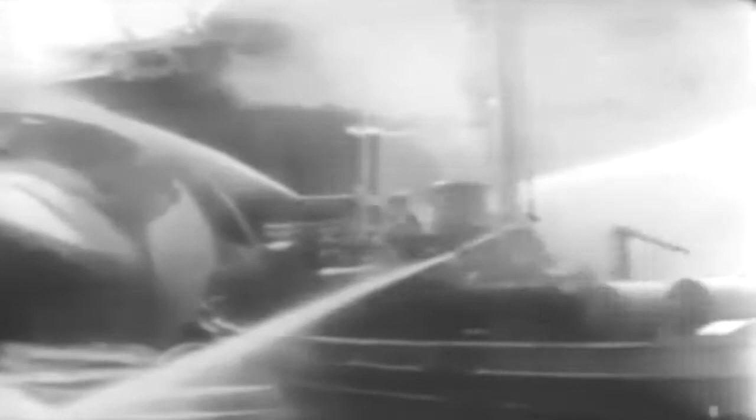The capsizing was the result of a combination of circumstances. First, the reduction of the ship's metacentric height, or stability, to a negative value, causing the ship to heel over. This took place soon after the streams of water had collected on the upper decks. Secondly, the ship's effective freeboard was reduced because of open air and cargo ports on E deck. As the vessel listed past 13 degrees, these ports were submerged.

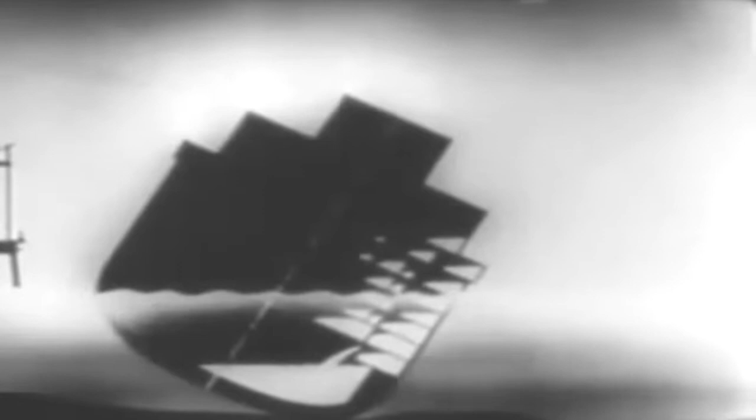Thirdly, a further loss of stability and consequent increase in heel due to the port bilge forward grounding on the rock ledge on the falling tide. The ship was completely flooded fore and aft up to the outside waterline.

The Secretary of the Navy appointed a special committee to make recommendations with respect to salvage or other disposition of the USS Lafayette. The recommendation of the committee was that the vessel should be raised.

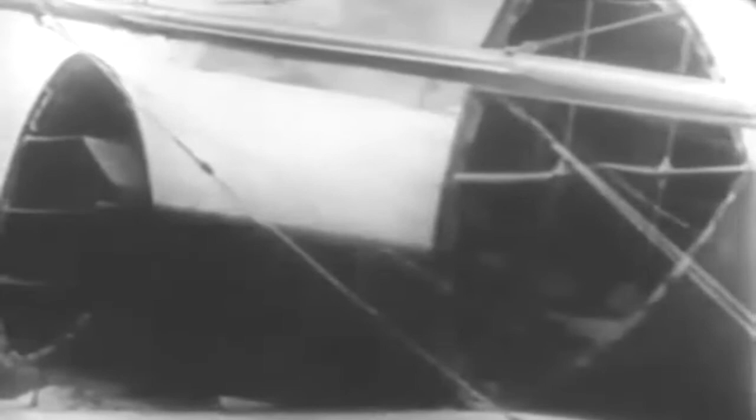The Bureau of Ships placed the vessel under the cognizance of the Supervisor of Salvage, Commodore W.A. Sullivan, who in turn was succeeded by Captain B.E. Manseau. They had at their command the facilities of the Navy Salvage Service, which consists of the salvage section of the Merritt, Chapman, and Scott Corporation, operating under the General Ship Salvage Contract, NOBS 36.

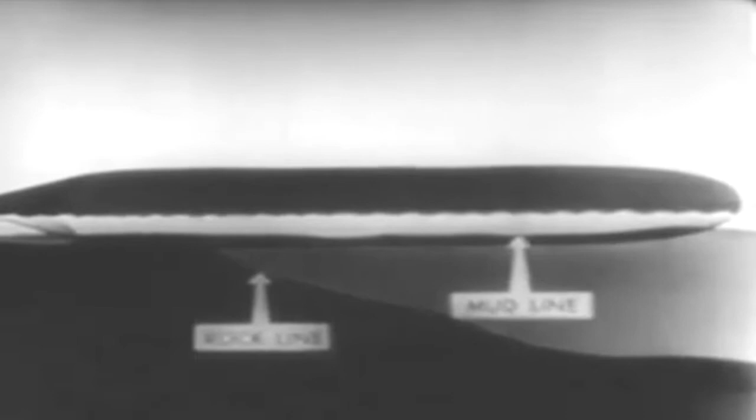At a point about 1/3 the length of the vessel from the bow, the rock profile of Manhattan sloped steeply off into the riverbed. A considerable portion of the vessel's weight rested on this rock shelf. The after 2/3 of the length of the ship was supported and surrounded by mud and soil of various densities. Actually, the possibility of salvage by pumping depended upon the soil in which the after portion of the ship rested ultimately developing enough bearing to resist the initial tendency to settle by the stern.

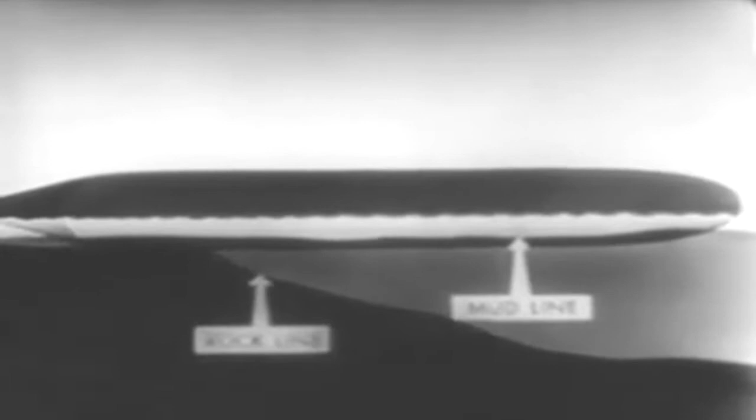It was the decision of the engineers that the ship should be raised by controlled pumping. To supervise the work, engineering offices were erected on a barge alongside the Lafayette, and details were worked out in the main offices of the Merritt, Chapman, and Scott Corporation. Upon Mr. A.C.W. Seekey, naval architect and consultant engineer, Merritt, Chapman and Scott Corporation, rested the entire program of stability and strength calculations.

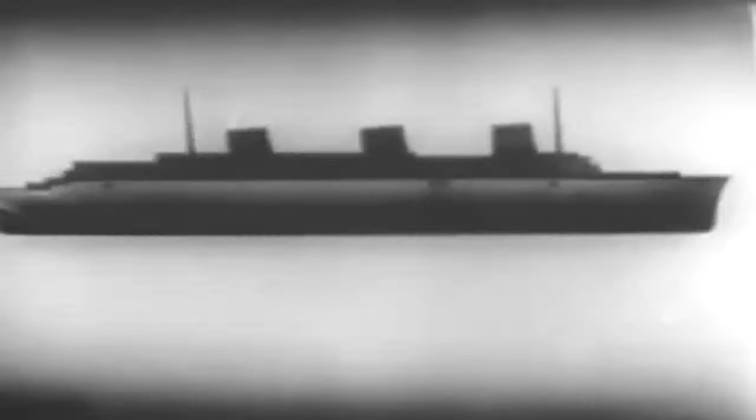The preliminary step in the salvage operation was the removal of the superstructure above the promenade deck. Controlled pumping involved the division of the ship into numerous watertight compartments. The compartmentation of the ship was based upon the original watertight bulkheads. Wooden watertight bulkheads were constructed between decks where no original watertight bulkheads existed.

To complete the compartmentation, the promenade deck and certain decks below were made watertight. This compartmentation was necessary to control the relationship between the center of gravity and the center of buoyancy during righting operations, and also to control any unforeseen leaks or failures.

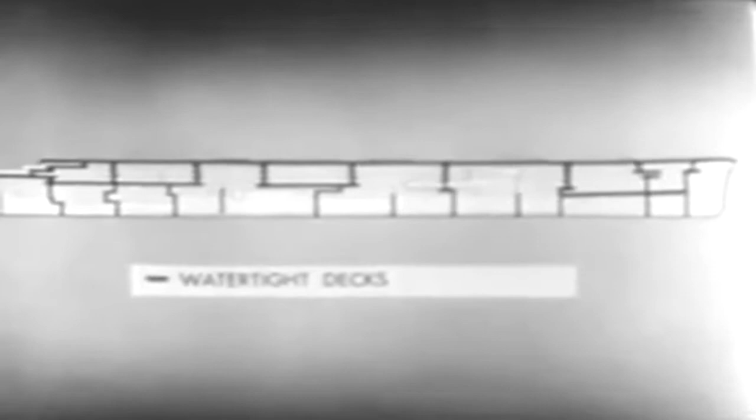At the beginning, there was only a limited number of experienced divers available. Consequently, 2 diving schools were organized at Pier 88, 1 civilian and 1 for Navy divers. As the student divers gained proficiency in handling underwater tools and the diving dress, they were sent out to do underwater work on the Lafayette. Eventually, as many as 73 civilian divers were employed at one time, besides a considerable number of Navy divers.

Diving conditions were extremely hazardous. Jagged steel edges and broken glass were an ever-present threat. The maze of debris-packed passageways presented a terrific problem. The men worked in complete darkness, the water in the slip containing such an amount of mud and sewage that underwater lights were useless. Work was accomplished by sense of touch alone.

Approximately 5,000 tons of superstructure was removed, slightly less than half of which was submerged and was cut away by divers using the underwater gas torch. These decks were removed to lower the center of gravity and to make accessible the various uptake openings for patching.

When the Lafayette capsized, furniture, stores, and other loose objects accumulated on the port side, blocking passageways, making it necessary for divers to clear away this debris before commencing the actual salvage construction. All minor cabin bulkheading and ship's piping was removed to lighten the ship as much as possible and to make room for the watertight bulkheads. These operations often were carried on in 50 feet of water and 10 feet of mud, since much of this debris had settled to the lowest possible point, the submerged port side of the ship.

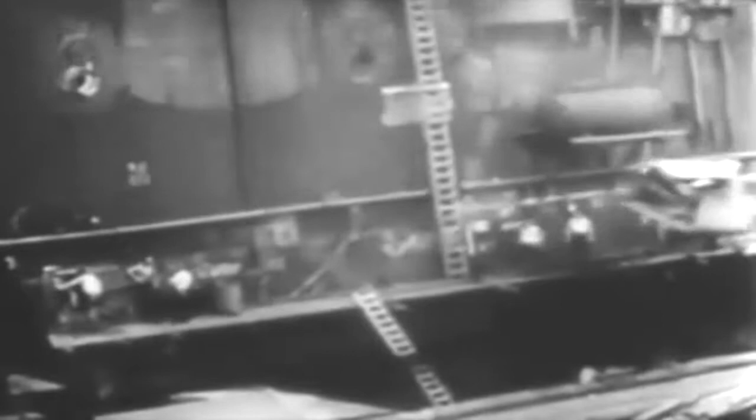After capsizing, cargo passages became vertical shafts, and through these shafts, scrap material was hoisted from the interior of the ship and deposited on barges lying alongside. Records were kept of the weight removed for future calculation.

A miniature industrial city sprang up on the starboard side of the Lafayette. Air compressors for the diving units, portable power generators, tool sheds, banks of cylinders containing cutting gas, firefighting equipment, winches, small derricks, catwalks, welding machines. Power and water lines ran the length of the hull.

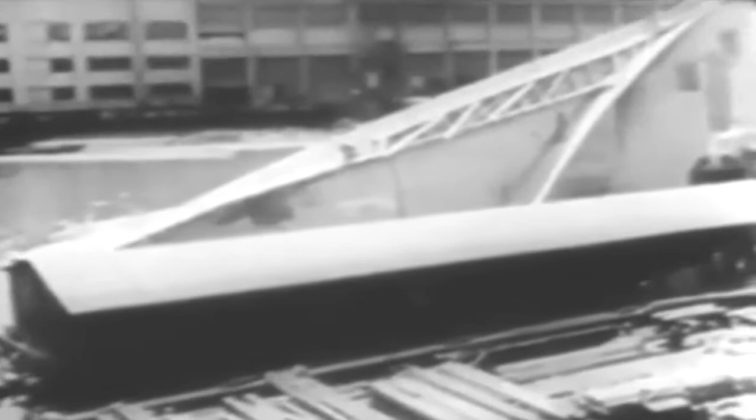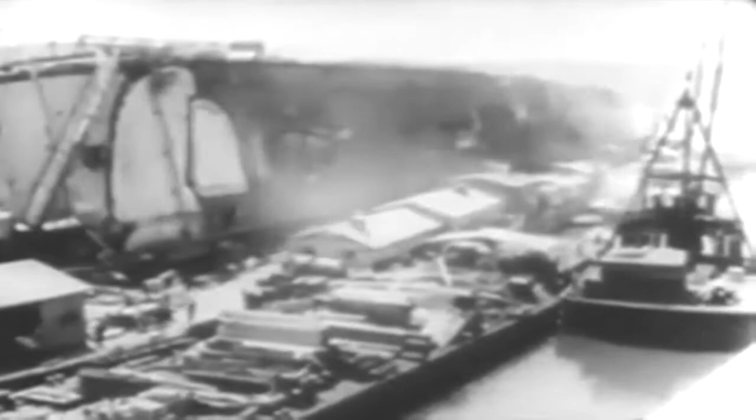Barges were moored along the almost vertical face of the promenade deck. These contained the blacksmith shop, the carpenter shop, machine shop, and engineering office, while other barges used as lighters passed to and from the ship carrying material and scrap. During salvage operations, the Lafayette presented a strange appearance to those aboard ships passing up and down the busy Hudson River, much like a giant Gulliver overrun with busy Lilliputians.

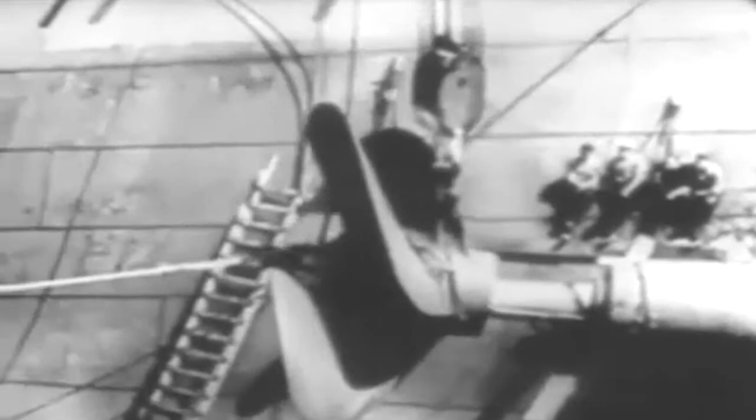To prevent any possible damage to the starboard screws, they were removed prior to righting operations. Each of the screws weighed 23 tons. The port screws, being submerged in 50 feet of mud and water, could not be removed.

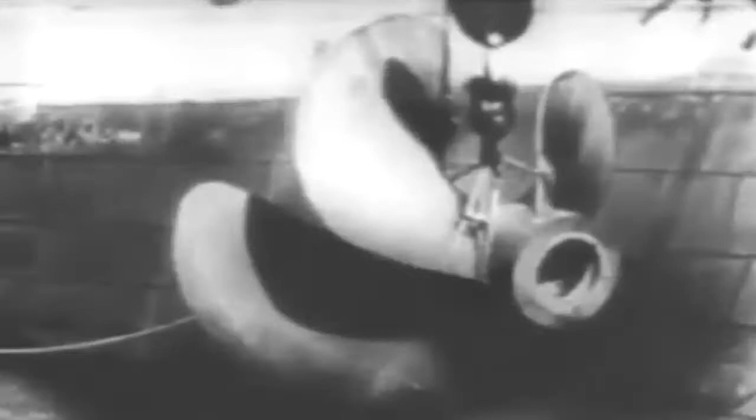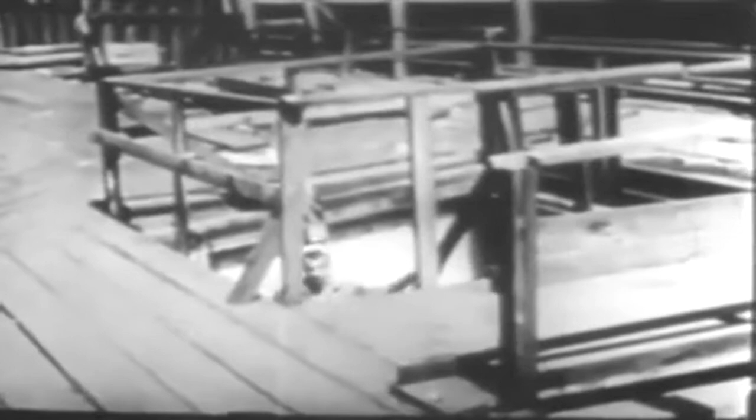The interior of the ship, as she lay on her side, presented another strange spectacle. Bulkheads became decks. Decks became bulkheads. Elevator shafts were used as companionways, and the former athwartship passageways were used as elevator shafts. Stairways and ship's ladders were useless, and carpenters were kept busy during the entire salvage operation building wooden ladders, platforms and scaffolding to facilitate movement of men and materials throughout the interior of the ship. Miles of ladders and thousands of feet of lumber were used in this construction.

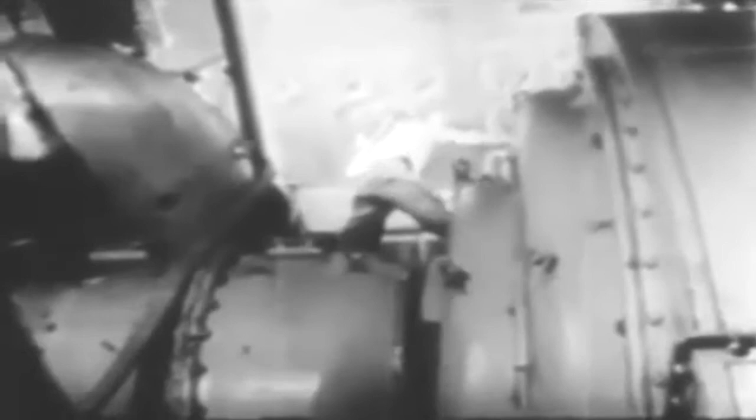Immersion destroyed the ship's electric system. 3 of the 4 turbines were inundated. But after the ship was raised, the blading of the turbines was found to be only slightly corroded.

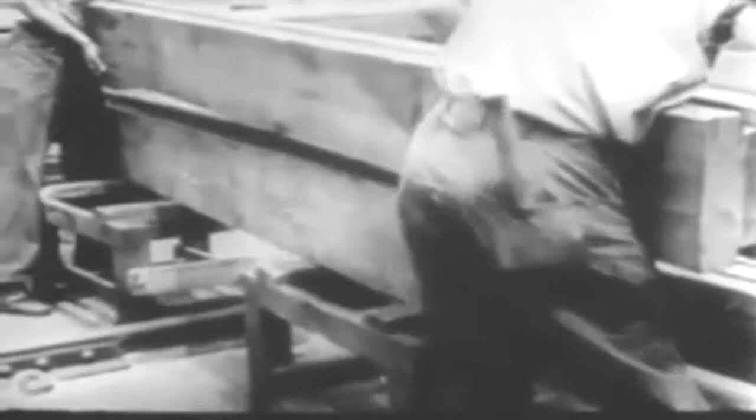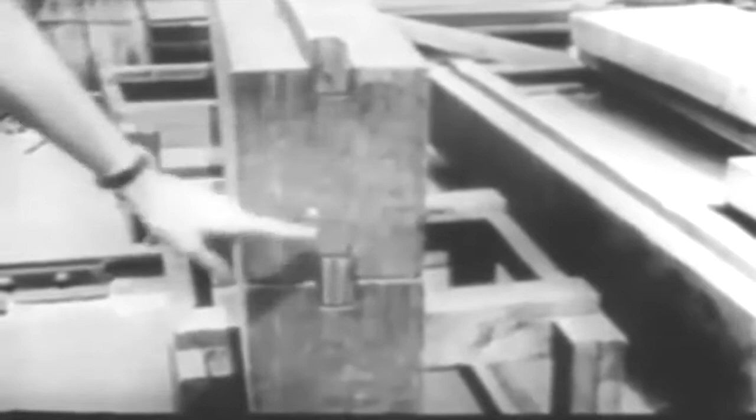To compartment the ship, it was necessary to install large wooden bulkheads. The bulkheads were constructed of grooved 8 by 12 timbers with a 2 by 4 joint. Approximately 210,000 board feet of 8 by 12 timbers and form lumber was used in constructing these bulkheads. If all bulkheads were placed together, they would make a bulkhead 350 feet long and 60 feet deep. The placement of bulkheads in the Lafayette followed this plan.

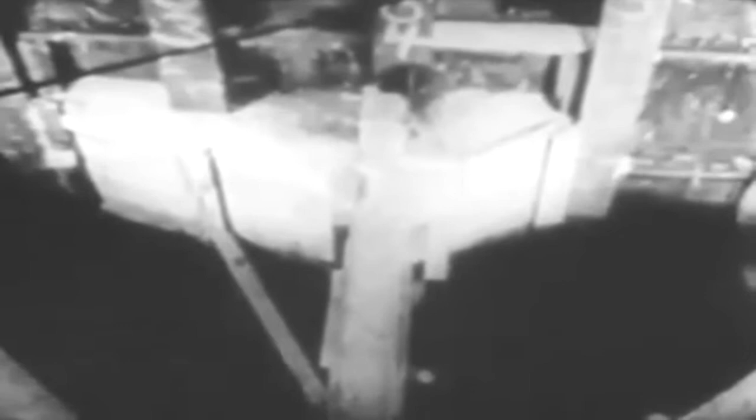For water tightness, concrete was poured where the wooden bulkheads met the ship's steel decks and where they met the skin of the ship. The concrete was poured underwater using the Tremie process. The concrete was pumped into forms by a Pumpcrete machine, sealing the wooden bulkheads to the steel structure of the ship. These bulkheads were built from above water downward, and 900 cubic yards of a 1-2-3 mix of concrete was used for the sealing.

To back up cargo ports and airport patches on the port side of the vessel, divers poured bags of concrete over these spots to strengthen them. 16 cargo ports and 356 airports were strengthened in this manner.

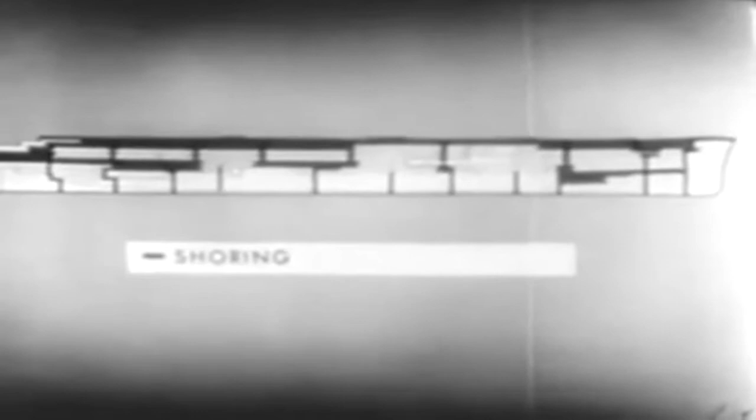The amount of shoring which had to be done is indicated here. In all salvage jobs requiring extensive pumping, the ability of decks and bulkheads to withstand the hydrostatic heads expected requires thorough consideration. Timber beams were placed between the original deck beams to support the deck plating against water pressure. The shoring extended from these timber beams to timber stringers on the deck below.

This is the shoring at C deck after the ship was raised to 30 degrees. A total of 90,000 board feet, or approximately 1.5 miles of shoring timbers, were used, and all the immense amount of material was placed and aligned by divers. Here are indicated the underwater openings on the promenade deck, which necessitated the construction of special patches.

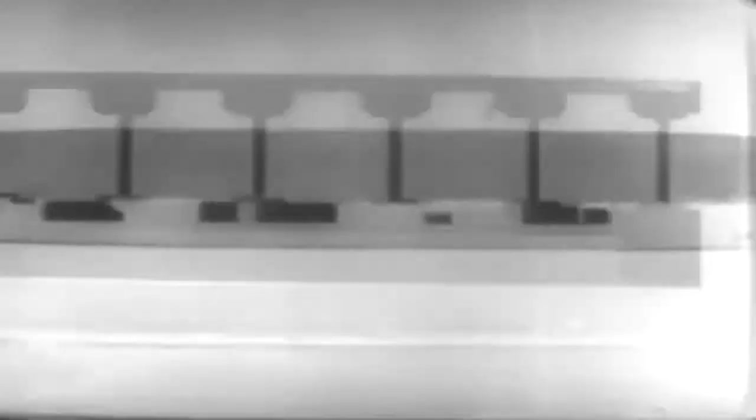The main patches were constructed in this manner. It is interesting to note that 21-inch steel I-beams were used. Also, that rubber gaskets used in patches were made from rubber recovered from the Lafayette's decking.

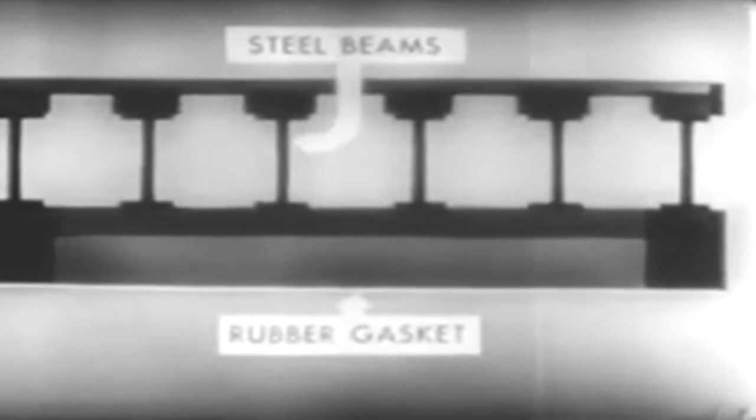The patches for the various openings were constructed on the barges moored alongside, and when completed, were placed in position through a combined operation of men on the surface, divers, and derricks. Here, a turbine uptake patch weighing 21 tons is being lowered into the water preliminary to transferring it to a vertical position for placement against the ship.

All large patches were equipped with gate valves through which water was permitted to flow to keep the water levels inside and outside equalized until ready to commence pumping. The valves also prevented flooding during pumping operations should that become necessary.

When the patches were properly seated, the rods or bolts which had been previously secured at the inboard end to a suitable ship structure by means of hinge shackles or levers, were run through corresponding bolt holes in the patches and bolted up by divers from the outside.

Captain J.I. Tooker, one of Merritt, Chapman, and Scott's leading salvage officers, was made superintendent of the work on the Lafayette. Captain Tooker was well suited for the Lafayette job in view of his previous experience in salvaging capsized vessels, and particularly in view of his many years' experience in diving.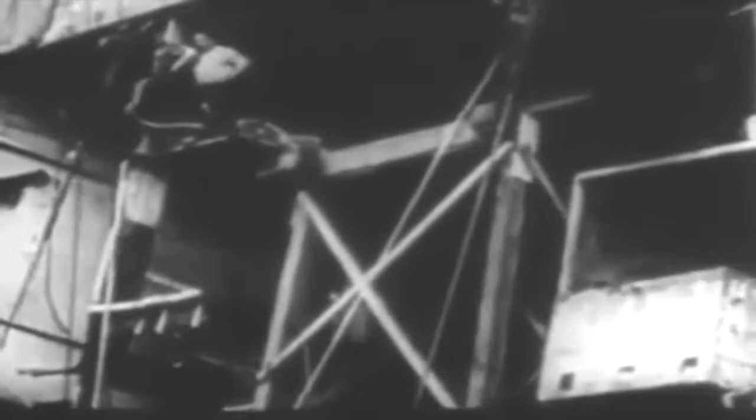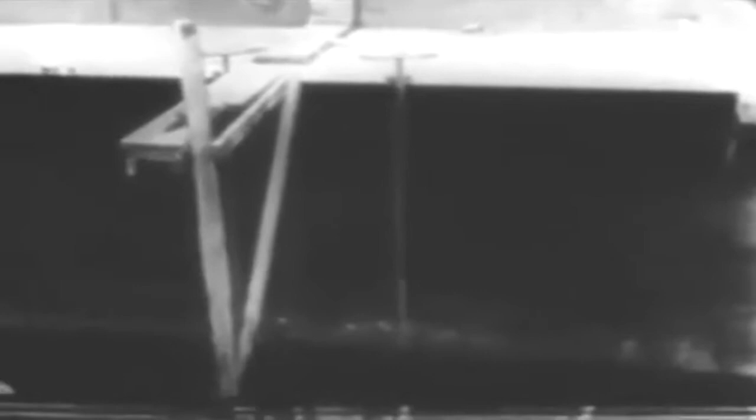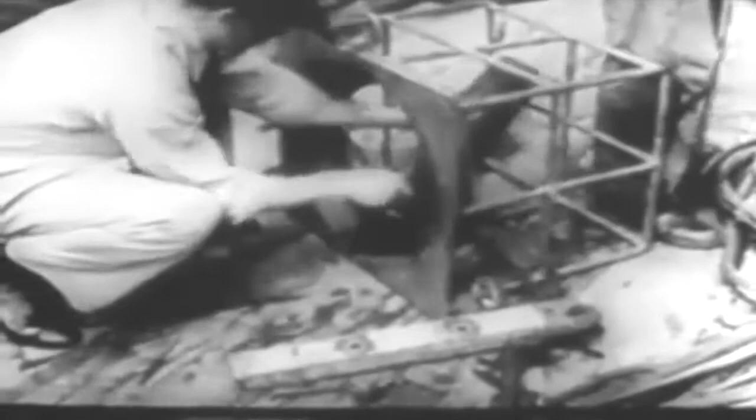Porthole patches were hinged discs of wood with strong backs. The patches were hinged to enable the diver to place the patch through the porthole from the inside of the ship. It was often necessary to excavate 10 feet of mud to place these patches, and sometimes it required a week's work for the placement of one patch. 356 patches were placed in this manner, one diver working the entire period of salvage operation on this job alone.

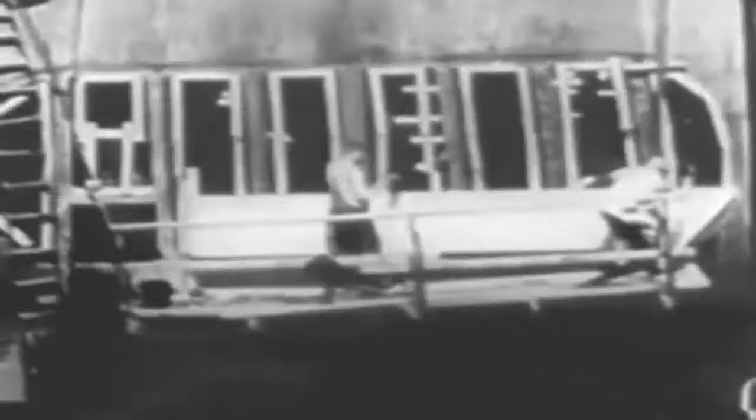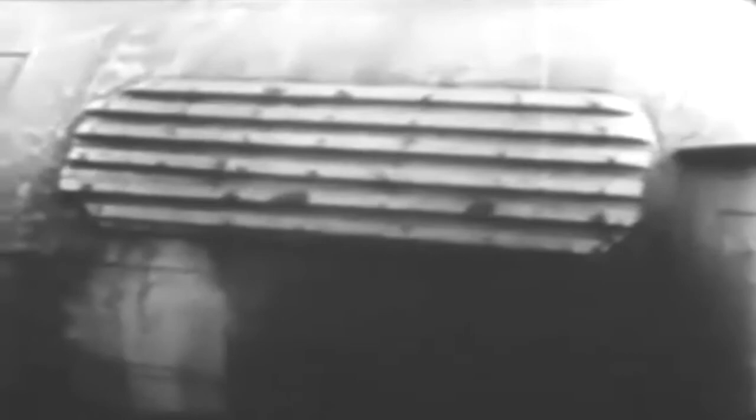As a safety precaution, the starboard condenser intake was covered with a wooden patch to ensure water tightness when the ship was righted. Wooden plugs were used to seal 4,500 small openings. All patches, plugs, shoring, and bulkhead timbers were prefabricated in the carpenter and blacksmith shops located aboard the barges moored alongside the face of the promenade deck.

Pumping of the Lafayette was accomplished by the use of 40 10-inch pumps, 32 6-inch pumps, and 25 3-inch pumps, capable of discharging 40,000 tons of water an hour. They were tested on the pier previous to installation. The placing of the pumps inside the vessel, just prior to the righting operations, was a hazardous and difficult job, involving in many cases considerable ingenuity on the part of the riggers.

It was necessary to locate a suitable number of 10-inch and 6-inch pumps in each of the watertight subdivisions of the ship to adequately de-water the compartments in a short time, and at the same time to provide a reserve to handle unexpected leakage. It was also necessary to have enough initial reserve capacity available to compensate for the expected reduction due to increasing head as the water level dropped and the vessel rotated.

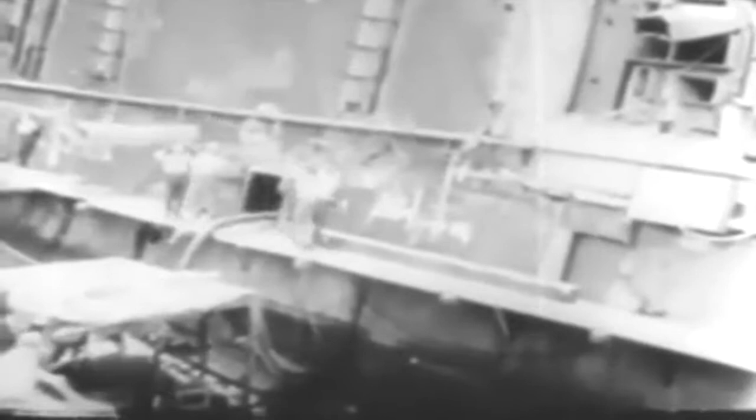In each case, suctions extended to the port side of the ship and, where possible, close to the watertight boundary of each compartment. Discharges ran nearly horizontal through the promenade deck. The pump platforms were hinged to the vertical decks and rigged in such a manner that as the ship rotated, the pumps could be kept in a horizontal position by slacking off on chain falls.

In order that gasoline-driven pumps would not exhaust in the compartments, flexible steel exhaust lines were carried up to the starboard side of the ship and out through air ports.

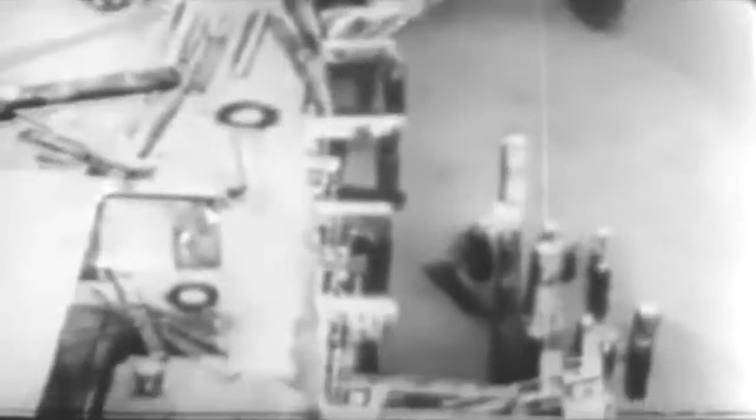When the Lafayette capsized, her rudder cut under the pier about 5 feet, shearing 5 piles supporting Pier 88. Since that portion of the ship still projected under the pier, it was necessary to remove a portion of the pier at this point to avoid any possible damage to the stern of the ship during righting. As a further precautionary measure, pile clusters were driven to act as fenders for the vessel to bear against as it approached a 45-degree position.

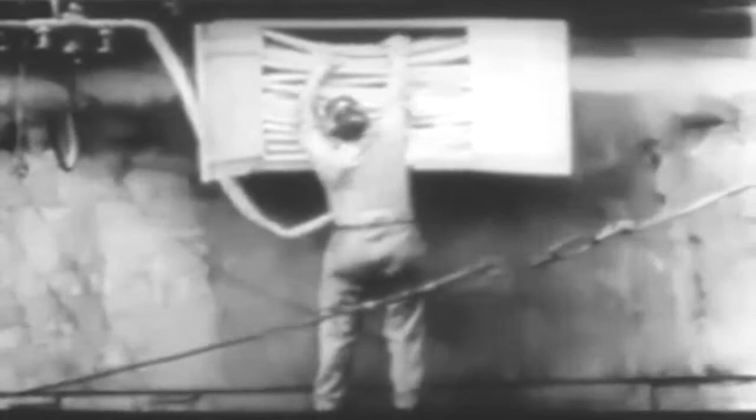From the very beginning of the salvage operations, it was necessary to take extraordinary fire precautions. After the initial fire and capsizing of the vessel, the embarrassment that might be caused by subsequent fires during salvage operations made it necessary to take exaggerated precautions, even though the probability of further damage to the ship because of fire was very small. Smoking was not allowed inside the hull while the ship was being cleaned or cleared, or during the final pumping operations when the possibility existed of gasoline fumes permeating the ship. A fire watch was always posted whenever there was burning with an oxyacetylene torch.

Various gas testing devices and implements were used throughout the salvage of the vessel as a constant precaution against the formation of gas from organic materials within the ship, and that created by the immense amount of city sewage draining into the slip in which the ship lay.

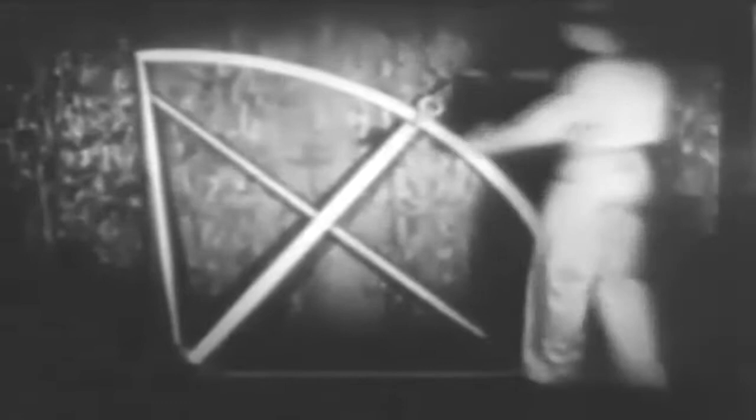4 instruments were constructed to give an accurate picture of the exact position of the ship at any time during righting operations. Draft and tide gauges were installed at various points throughout the ship. A clinometer was constructed to record the angle of list of the ship.

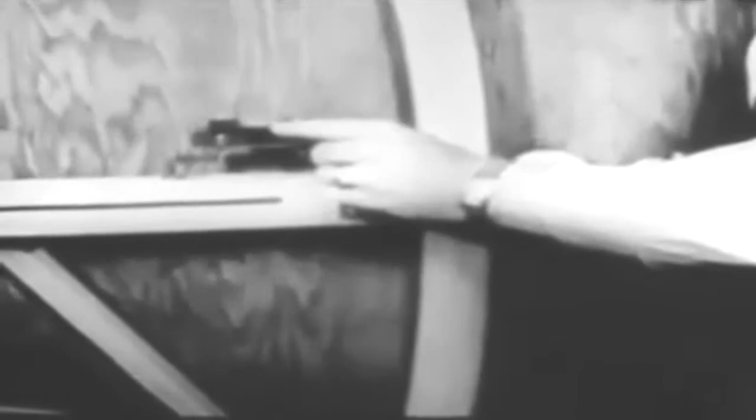A movement gauge was installed to indicate the movement of the ship toward Pier 88. The compartment testing was completed with the 2nd of August, and after thorough preparation, an overall pump test was made for a 48-hour period, during which time divers applied sawdust to all patches and seams where minor leakage might exist, with the result that the ship was nearly bottle tight.

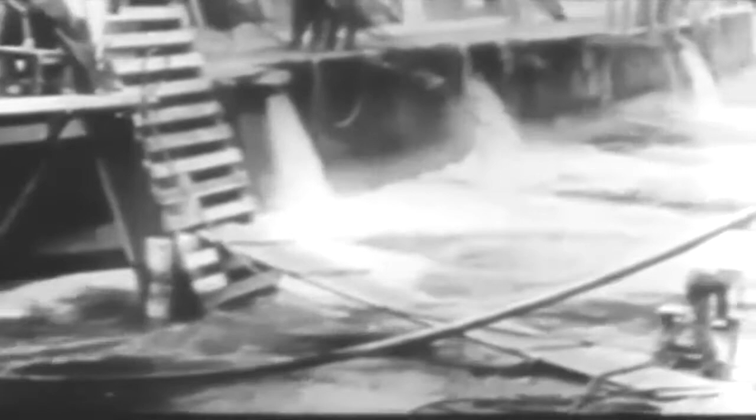Pumping operations were under the direct supervision of Captain B.E. Manseau, USN, Supervisor of Salvage, and Captain Tooker. Because there was no particular reason for speed, and because it was extremely important to build up no forces or develop leakage which could not be controlled, pumping continued cautiously, and each rising tide was utilized to supply the additional buoyancy necessary to move the ship.

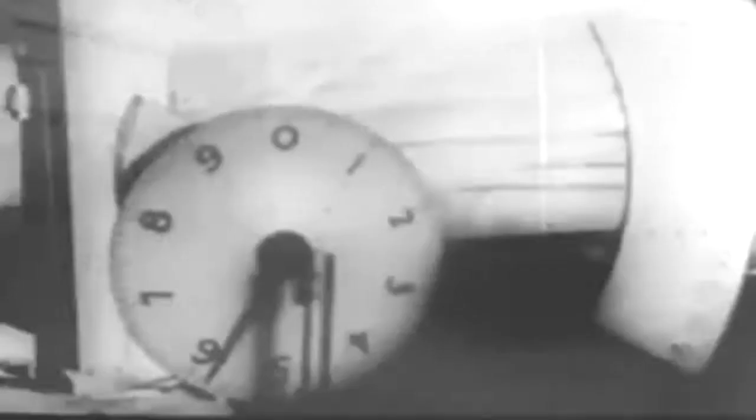Air and water jets installed in various patches on the port side and along the port edge of the promenade deck were started and maintained continuously in order to relieve any mud suction that might exist. At 0800 on the 6th of August, there was a 16-foot negative head. With the rise in tide, the buoyancy increased, and at about 1/2 tide, the vessel started to roll slowly and steadily.

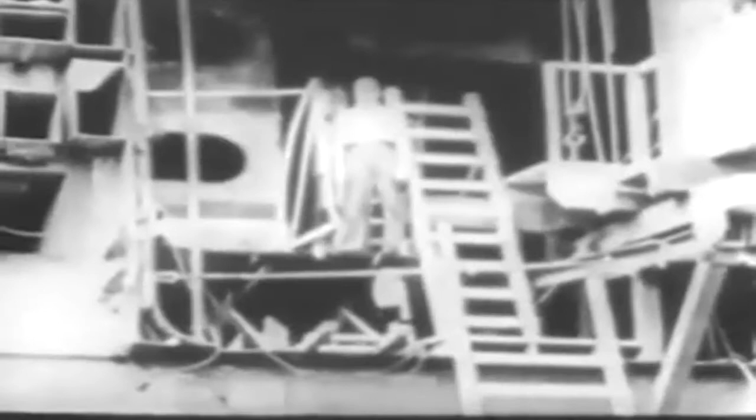During the pumping operations, readings were taken every 15 minutes on the movement gauge, draft gauge, and clinometer. These readings were all transferred to the control office on the ship for the recording and plotting of the movement of the ship.

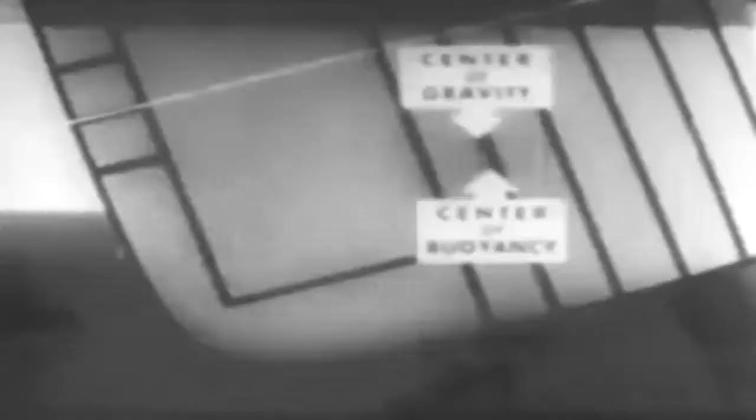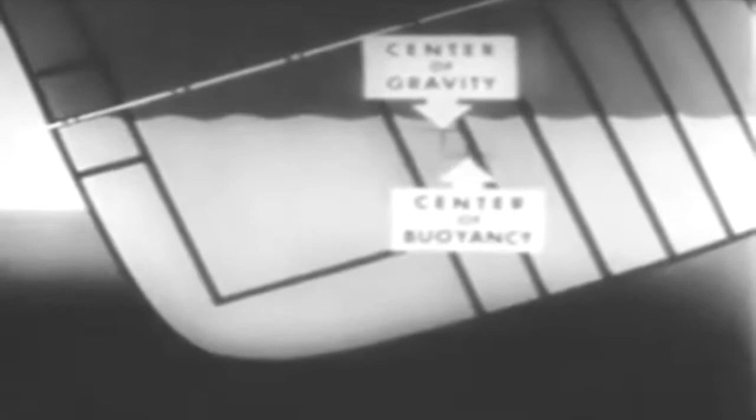In its initial capsized position, with all decks above the promenade deck removed, the center of buoyancy was about 2 feet farther from the keel than the center of gravity. This gave the Lafayette the initial tendency to right itself. As water was pumped from the ship, the buoyancy increased with a corresponding decrease in the weight of water in the ship. Also, the distance between the center of gravity and the center of buoyancy increased. The result was an increased tendency of the ship to right itself, pivoting about the turn of the bilge.

It became apparent that each time the water in the ship was lowered relative to the outside water level, the ship started to rotate, and the instant pumping stopped, the ship's movement stopped. It was felt that absolute control could be maintained over the vessel's every movement. During the righting operations, Rear Admirals E.L. Cochrane and J.J. Broshek inspected the ship.

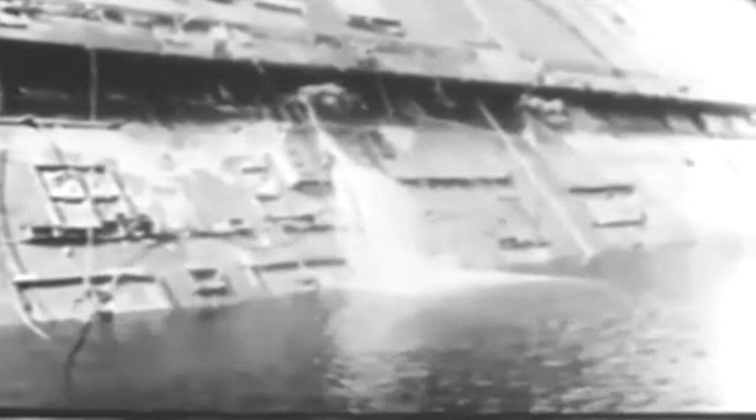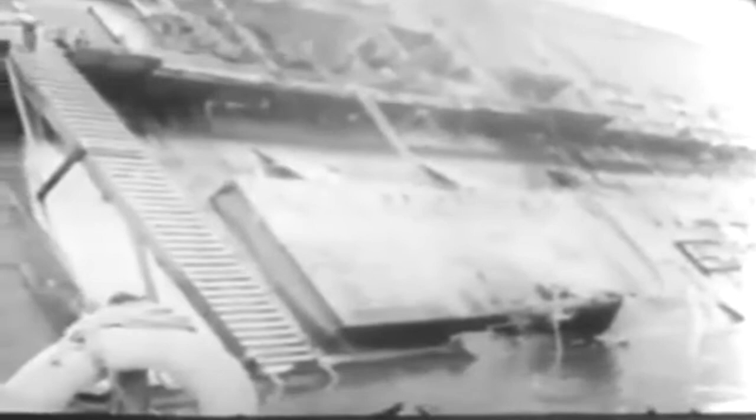As the promenade deck rose above water, the patches became visible. The patches on the underwater or port side of the promenade deck covered openings similar to those on the high or starboard side. Measurements for the underwater patches were obtained by checking the openings on the high side and further checking by divers the underwater openings. Total weight of all these patches was 350 tons, the largest single patch weighing 52 tons. It was 54 feet long, 22 feet wide, and 3 feet deep.

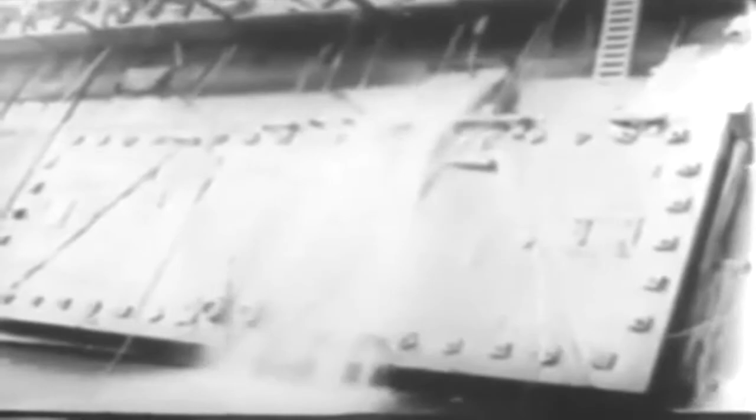During the process of removing all decks above the promenade deck to lower the center of gravity and to facilitate patching, it was found impossible to remove all of the boat deck, the last 10 feet of this deck being so deeply buried in the mud that the divers couldn't reach it. Consequently, when the righting operations had progressed until this remaining portion of the boat deck appeared above water, this section was removed using torches to further lighten the weight on the port side of the ship. Approximately 500 tons were removed.

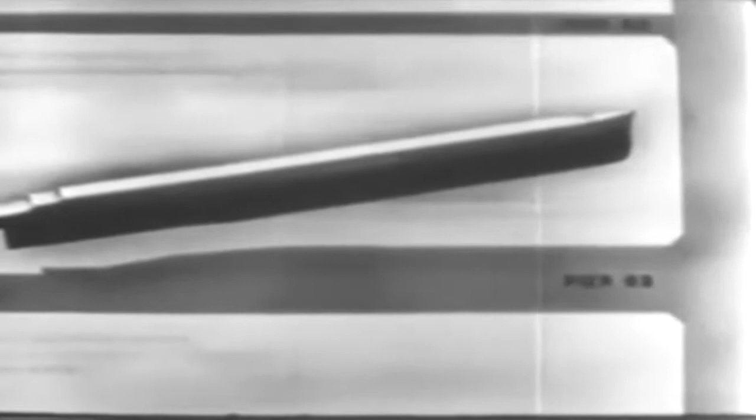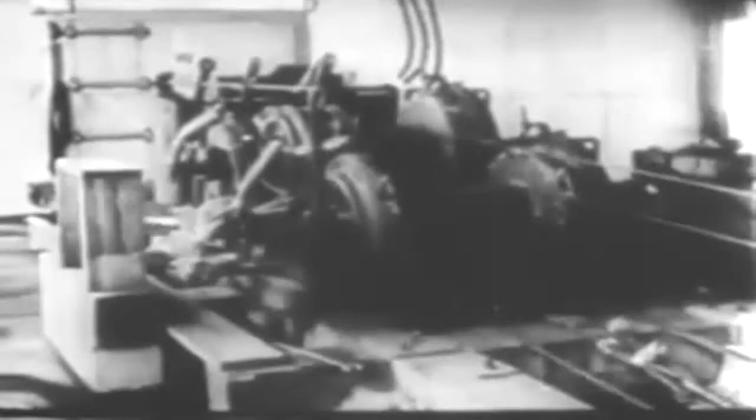In order to secure the fore and aft movement of the vessel in the slip, special mooring arrangements were designed and installed. 40 horsepower, 2-drum winches supplied the hauling power for each set of mooring lines. The hauling part of the standard 9-part beach gear tackle was led to the drum of the winches.

As the stern came afloat during the early stages of pumping, a steady pull was maintained on the cables leading to Pier 90, so that by the time the vessel approached its 45-degree position, the stern was well clear of the safety fender pile clusters along the north side of Pier 88.

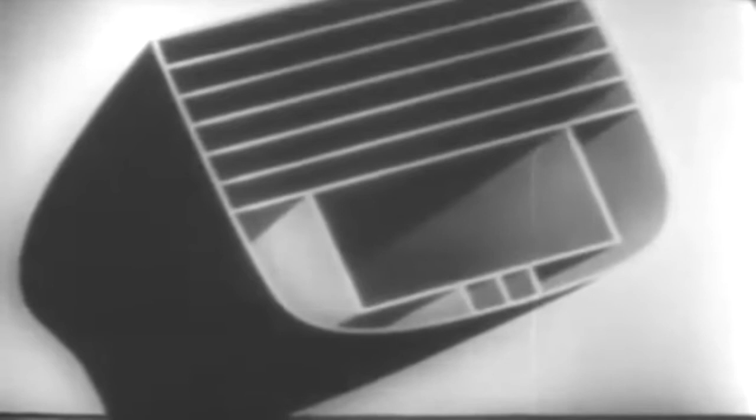Early on the morning of the 9th of August, as the Lafayette reached an inclination of 49 degrees, the pumps in compartment 16 were unable to lower the water beyond the existing level. A leak of extremely serious nature had developed in the way of the rock ledge. The damage occurred just under the turn of the bilge on the port side between frames 224 and 244.

Due to the movement of the ship on the bearing rock, the hull plates had been cracked, the cracks extending 54 feet long and 27.5 feet wide. After the approximate position of the leak was known, divers attempted to stop the leak by using bags of rags. This attempt was unsuccessful.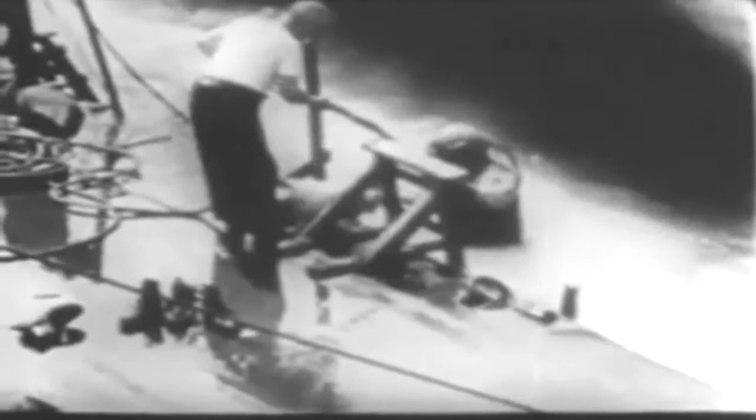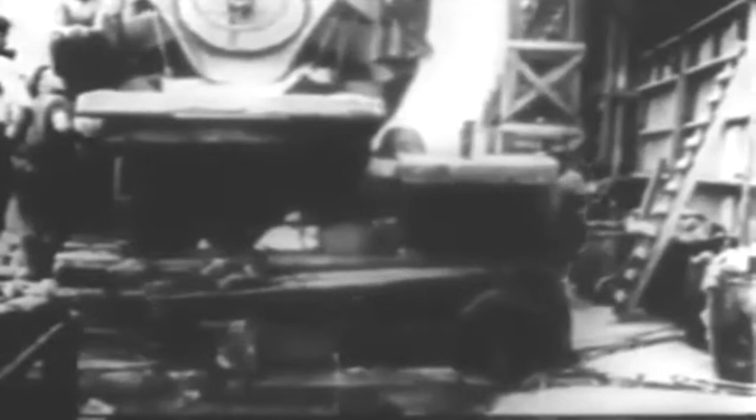A second attempt was made to stop the leak by pouring 100 cubic yards of concrete on the tank top. The concrete pump was used to pump the concrete into place, and pouring was accomplished by the Tremie process. The area indicated is the first pour in compartment 16.

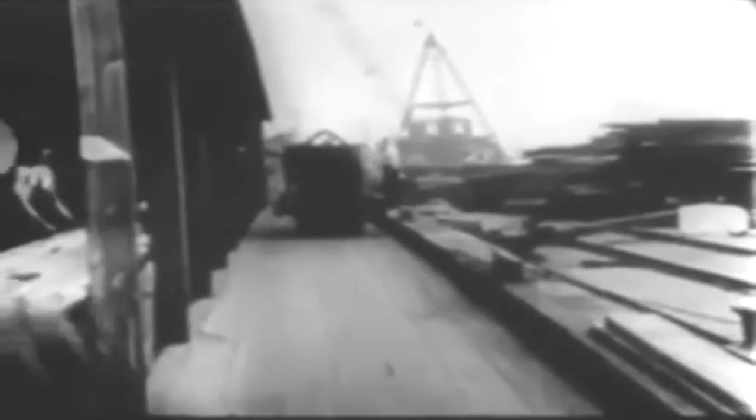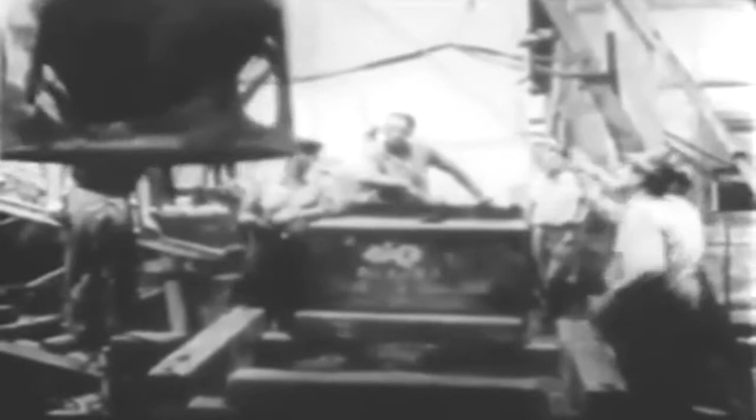At first, this method seemed successful, but suddenly the water commenced to rise rapidly with all pumps going. Subsequent inspection by divers indicated that a rupture in the tanks had opened, abaft the concrete dam which had been previously laid. Following considerable study and search between the 22nd and 30th of August, it was decided to again attempt to stop the leak by filling all the double bottom and wing tanks in the way of any of the ruptures with 800 tons of concrete.

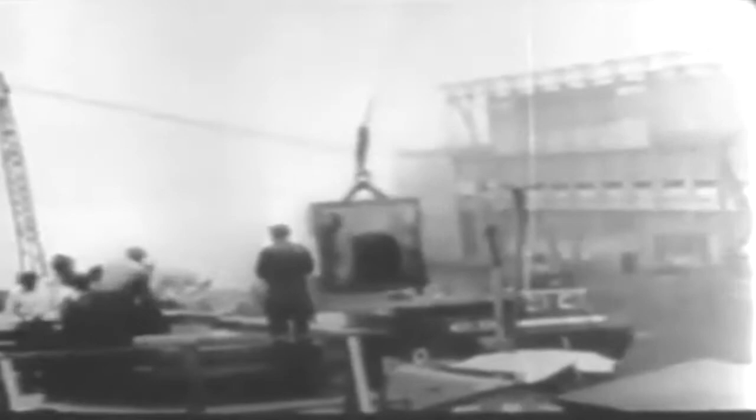In the meantime, by further pumping in compartment 16 and adjacent compartments and ballasting of the starboard side, the list was reduced to 25 degrees. The greater surface covered by the second pour was in the double bottom and wing tanks.

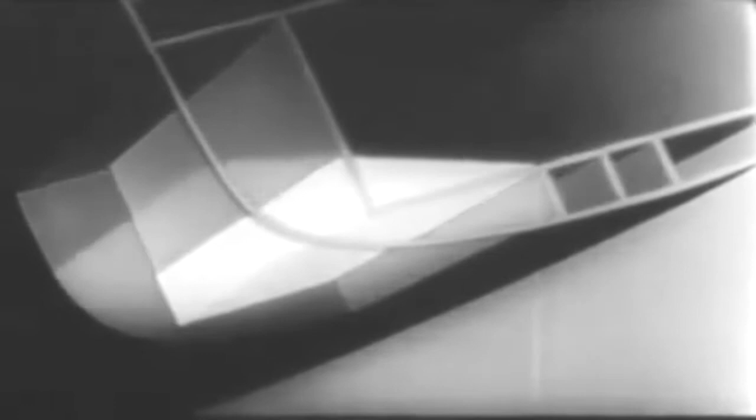Pumping was again started, raising the ship by parallel rise. And on the morning of the 15th of September, the Lafayette floated clear at both high and low tides. The old water lines left by surface oil could clearly be seen. Divers could now reach the damaged area from the outside, and several thousand bags of rags were stuffed into the cracks.

From the 16th of September, work was directed toward removing the tremendous amount of timber and concrete construction from the port side of the ship. All port side patches were removed, the removal being a much easier task than the placement. To reduce the list, the starboard wing tanks and double bottom tanks were ballasted with fresh water, and further work continued, removing the remaining water and the large quantities of mud and debris.

A collision mat was placed over the damaged area to secure the leak, in order that the Lafayette could be taken to a dry dock. This mat was one of the largest ever constructed, being approximately 65 feet square, made by sewing standard Navy collision mats together. It was placed and secured by hogging lines attached to the bottom and the top of the mat.